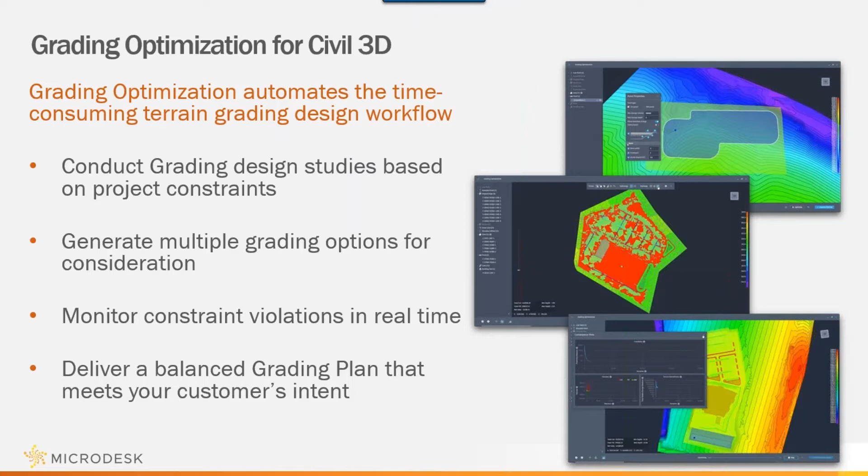All right, so I have a simple file here with just a handful of different objects that we can utilize to play around with. Some of this line work you see in this portion of my site is just lines and polylines, nothing fancy going on here. I do have an intelligent Civil 3D surface, but everything else is just simple two-dimensional lines and polylines, no elevational data, no design information whatsoever at this point.

So the new grading tools will be found over on the Analyze ribbon tab. If you work your way all the way to the right-hand side, you'll see the grading optimization panel. There's a couple things we can open up, and one of them is going to be the grading object browser, and this is where the intelligent grading objects are going to be stored once they're defined.

So all of the grading tools will be found on your tool palettes, just like your typical assemblies and things like that. They're going to have their own tab, and here's all the various grading properties that can be assigned to different object types. You can assign them and then set the properties, just like an assembly would be, or you can set them in advance.

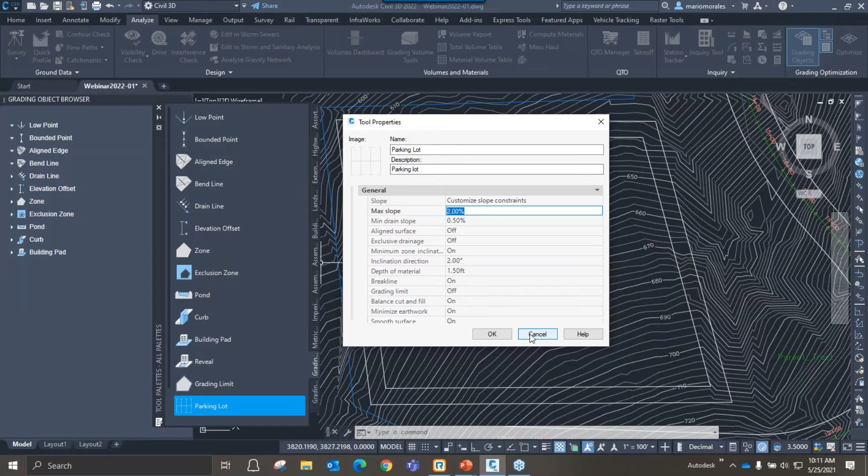So let's go ahead and start assigning some properties. I'm going to start off by establishing my grading limit, so I'm going to select that polyline there and press enter. You'll see that the properties of that object come right up, and I can see that that has established my grading limit here.

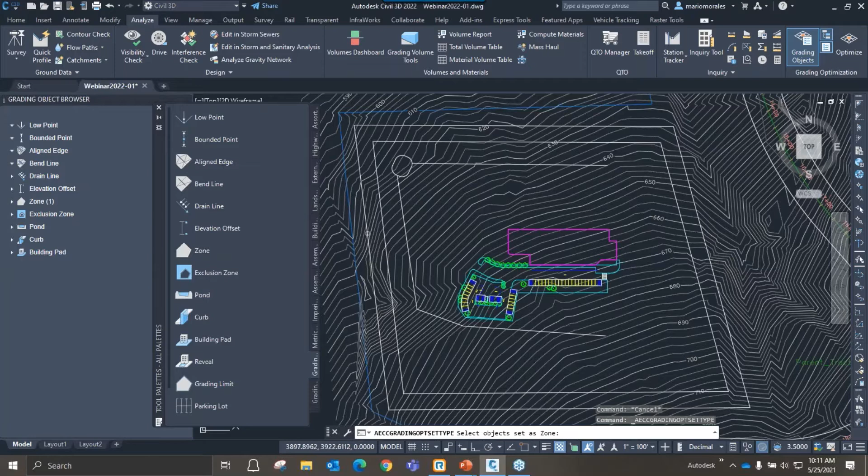And then I can use my global design constraints, or I can specify my minimum and maximum slopes, or I can use no slope constraints at all. So that one's been defined. Then I'm going to go ahead and create another zone, just a grading zone, up to the grading limit, so I have a grading buffer. This one is not a grading limit, so it's just a defined zone.

Then I'm going to work my way into the site and establish a building pad. I'll select this, enter, and again I can choose to give it a known elevation I've designed for, or I can leave it off and let the software figure out what that pad is going to be. I can also define a depth of material as well as colors. So that looks good, let's continue on.

Let's go ahead and do some curbs. So I'll go ahead and grab all these little curb islands, and now those are all defined as well. If I select any one of those, we can see the properties that have been defined.

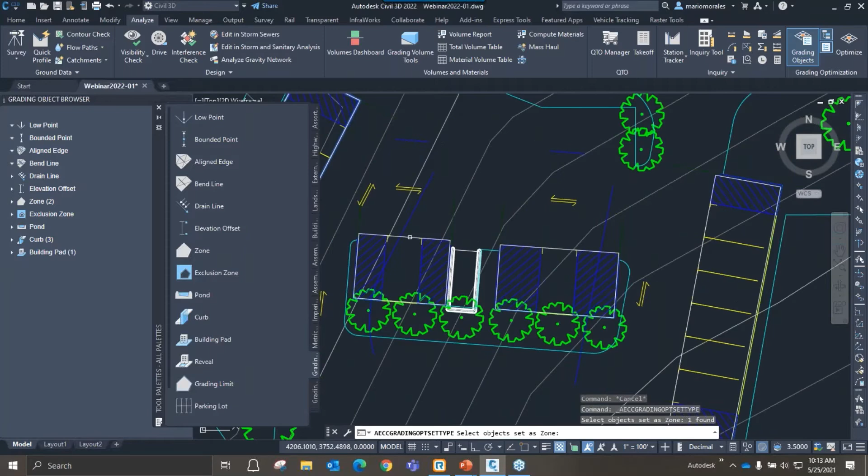I can then define some of these parking stalls here, here, here, here, and here. Now those are all defined as well, and you can see it's adhering to those properties that we just looked at a moment ago. So that's all looking pretty good. Let's go ahead and put in a pond.

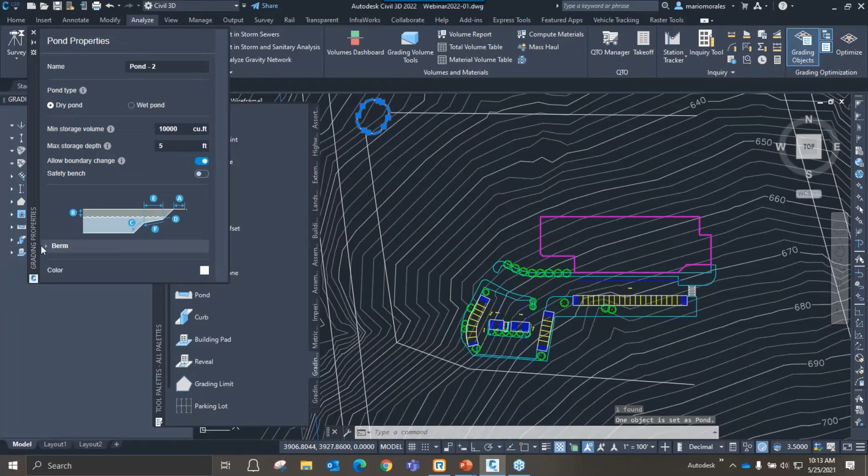Select that, and my min storage is going to be 10,000. Let's go ahead and go with a maximum depth of 5 feet. That looks good. I can choose to put a berm additionally on there if I choose to, or adjust that edge condition however I like.

And then I'll add a couple drain lines, flow lines if you will. So these can be just graded flow patterns or ribbon gutters or whatever you'd like them to be.

All right, so we've just defined a few different objects. There's other things we can do. We can use low points and set a couple of COGO points to grade to various locations and different things like that. But for now, I think this looks pretty good.

So let's take a look at what design iterations may come from what we've just defined. You can see also on my object browser that all of these elements I've defined are stored in here now, and I can select these. I can change the properties at any time. You can also change them as the design iterations evolve.

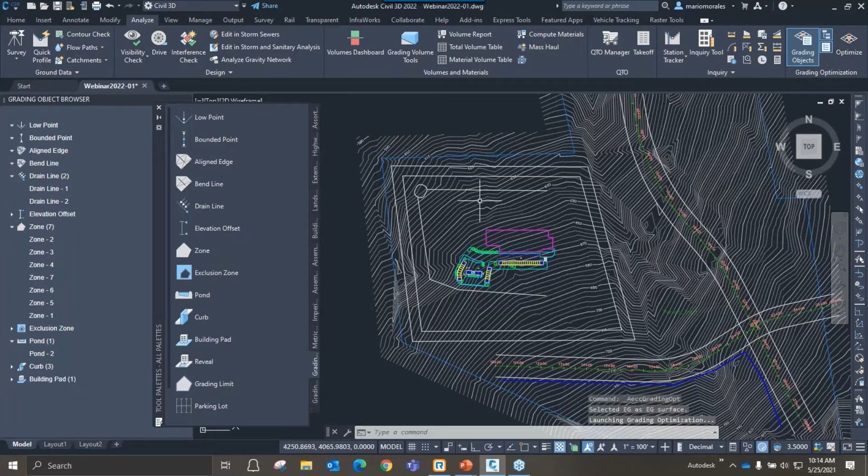So let's go ahead and try this out. We're going to go up and choose Optimize. Give that a second to launch. And as you can see, it opens up in its own standalone application window. So it's going to take a second to generate.

And now I can navigate about this site. I can look at anything I want in here. And I can also select elements, just as we did in Civil 3D, and change the properties.

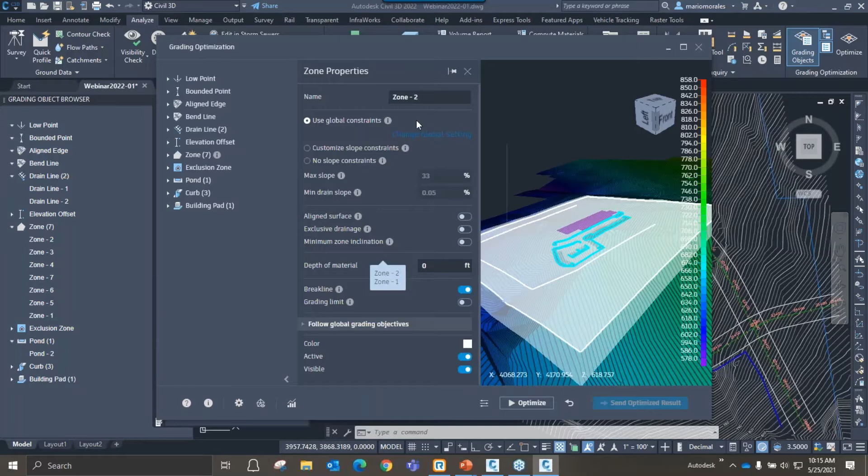So if I don't like the way the design is going, I can change things on the fly, and that's how I can come up with different iterations. So before I begin, some of the other things I'm going to want to look at are going to be the settings. So what are my slope conditions?

So my maximum slope is 33%. Let's go ahead and make it something flatter. I know I'm going to get violations, but I actually want to do that so we can see how we get that real-time feedback.

We'll do slightly less. We'll do 50,000 iterations. And now we can control what we want the outcome to be. Do we want to balance the cut and fill? 100% means yes. We can take that down to somewhere in the middle.

Or if we don't care about the balance at the moment, we just want a good design, we can take it down much further. We can adjust, minimize the earthwork, and then we can even tell it to smooth the surface and triangulations as we go. So for now, I think I'm just going to take that down a little bit. That looks good.

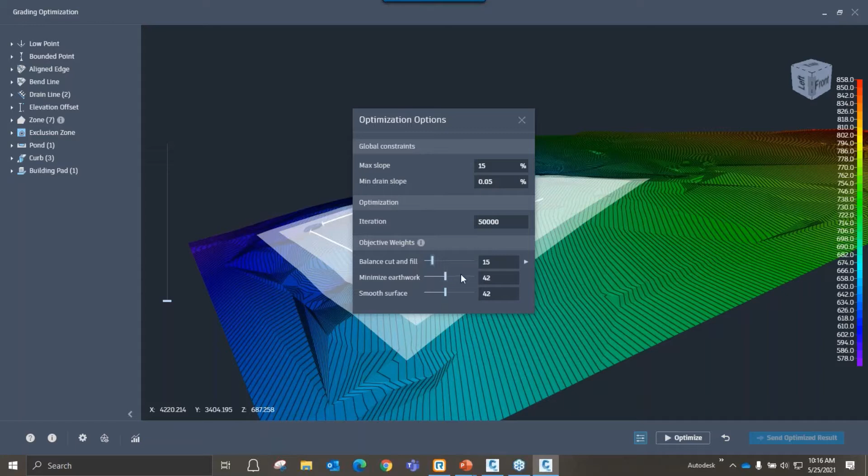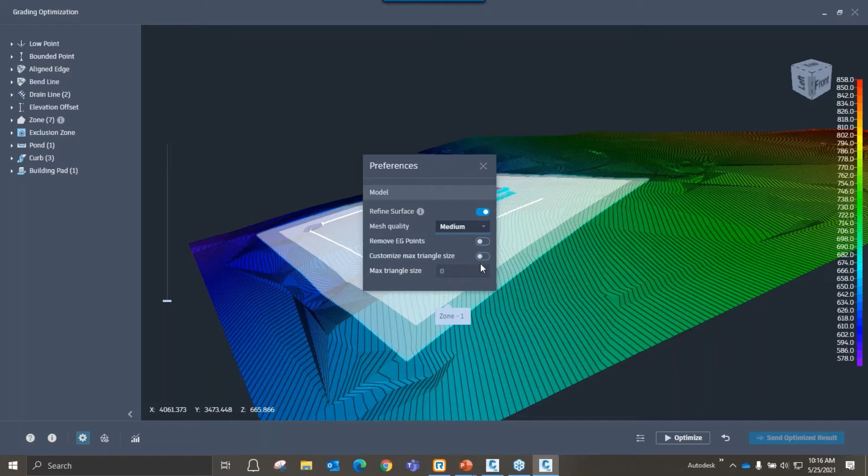And then over here in our settings, we can also tell it some of the preferences of what it's going to do as it's generating the final design. So what is the quality of the surface tin? We'll leave it at medium right now. We can also get rid of any of the EG points, and we can adjust the triangle sizes as well. So I think that looks good for now.

And so let's just go ahead and say optimize. You can see how the feedback is coming in. I'm getting a notification that between my grading limit and my first zone, it's about 39% slope, which is still less than a 2-to-1, so I'm okay with that.

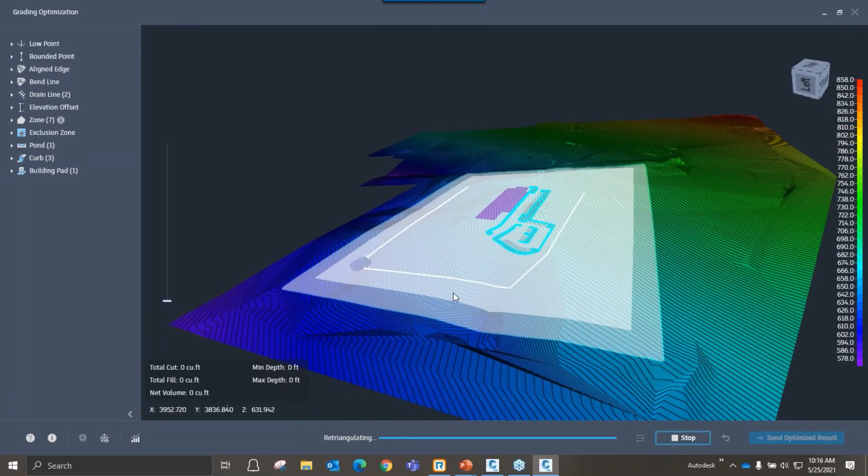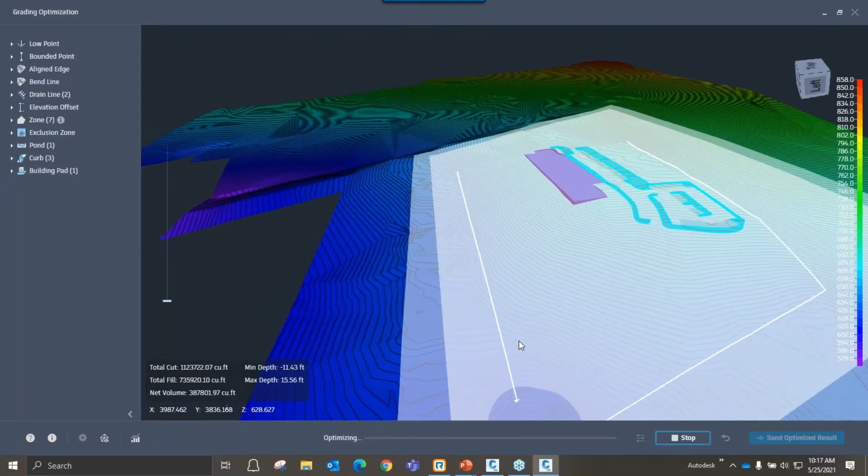And now you can see how it's taking my 2D line work and it's already building up a grading pad. I'm starting to get a pond over here. We can see the flow lines, and you can actually see those contours dynamically adjusting as it's refining the design. And you can see how the parking stalls have a flatter grade than the rest of the parking area does.

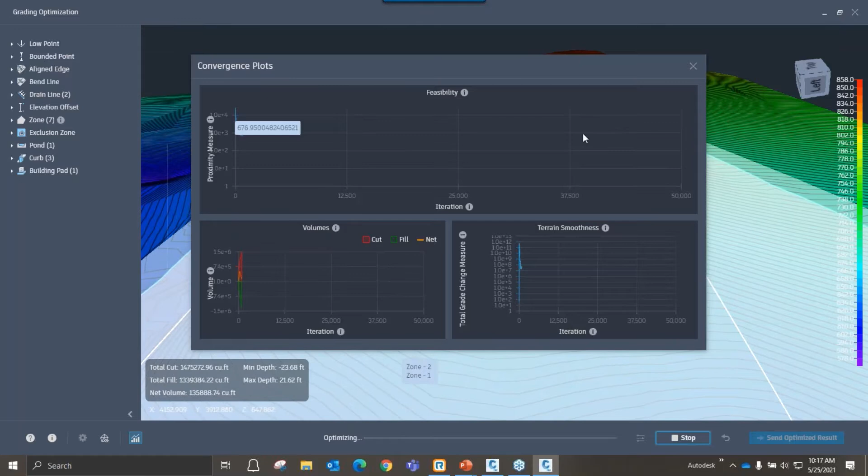We can also turn on the heads-up display controls and look at the convergence plots and see how it's going through the different iterations. As you can see, it's just barely starting those 50,000 iterations. And you don't have to wait through the 50,000. You can iteratively stop this whenever you choose to.

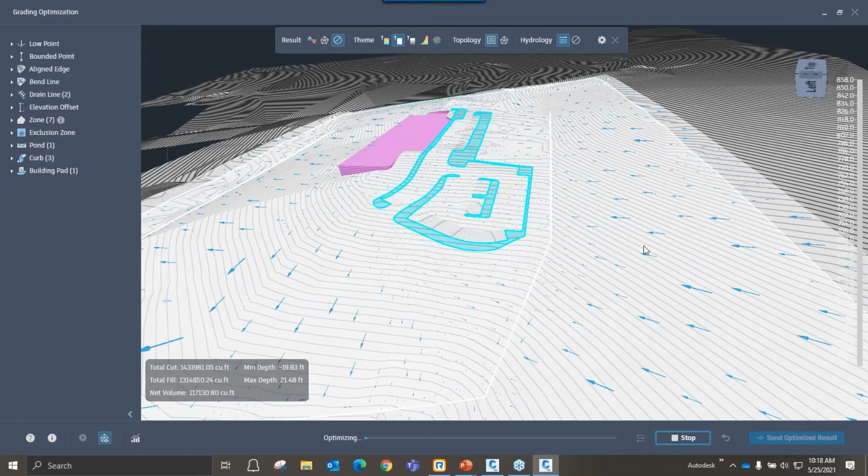But what we can do is we can also control how we're seeing this. We can just look for the red spots to see the slopes that are pretty extreme. One of the things I like to typically do is turn on the hydrology, which is going to show me the arrows, the flow directions. And that's going to show me how my flow lines are working. Okay, and everything's draining to that pond over there.

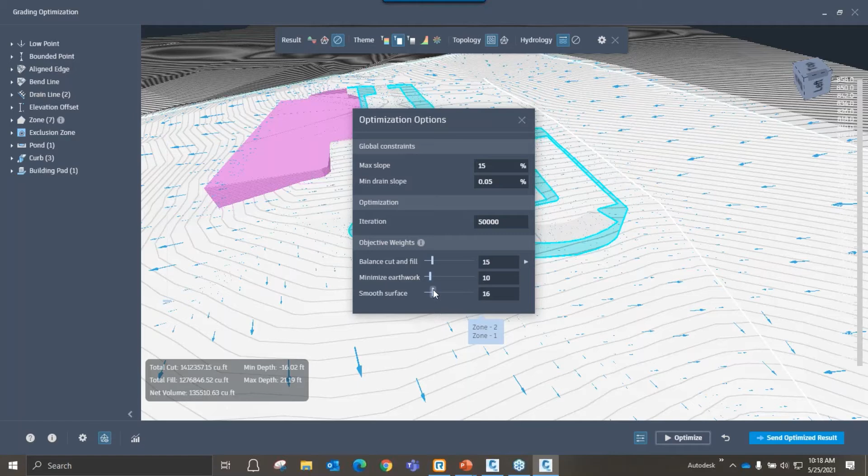That looks good, and again I can stop this at any time. Then I can simply come in and say, well, that looks pretty good, but let's minimize some of this earthwork adjustment. We don't need to worry about smoothing right now. And then we can run it again.

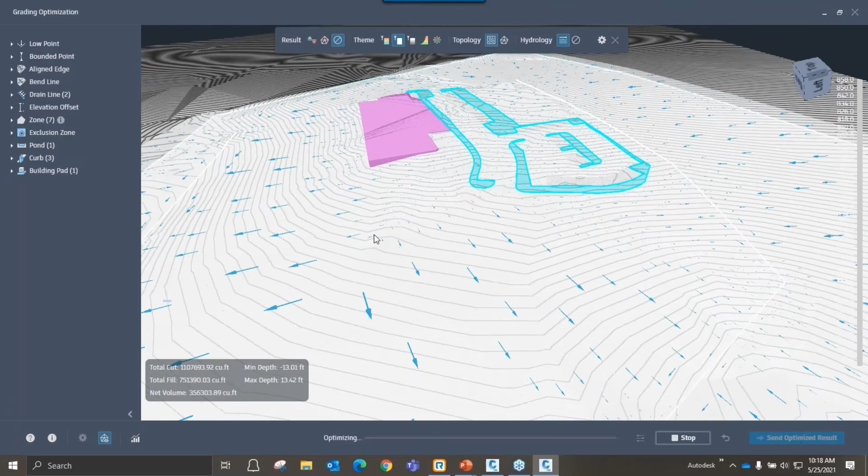You can see that pad is built up there. It's going to reset with those new values I've chosen and come up with a new design concept. So it's working its way through thematically, looking at the different rules, properties, and constraints I've defined, and it's defining that site for me. I haven't had to go through and calculate a pond size, depths, or a building pad at this point.

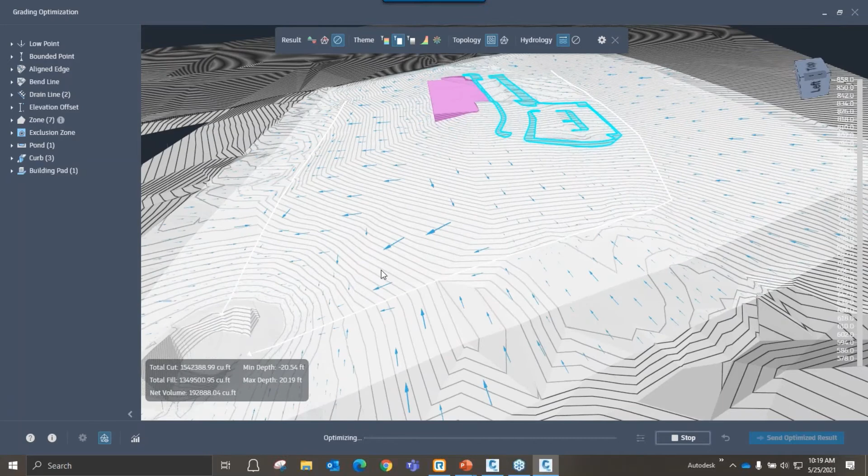It's just simply going through and figuring out what my design is going to be. Again, I can let this thing sit and run until I'm happy with it, and I can stop it at any given time. When I'm done and everything looks good, I can simply stop this, go over, and say send this optimized result.

Then back in Civil 3D, I can choose to bring in a new surface with all of this new grading in it. I can have it generate the feature lines, so I'll have 3D polylines for all the curbs, slope edges, and ponds. Any low points I may have done will come in as COGO points as well.

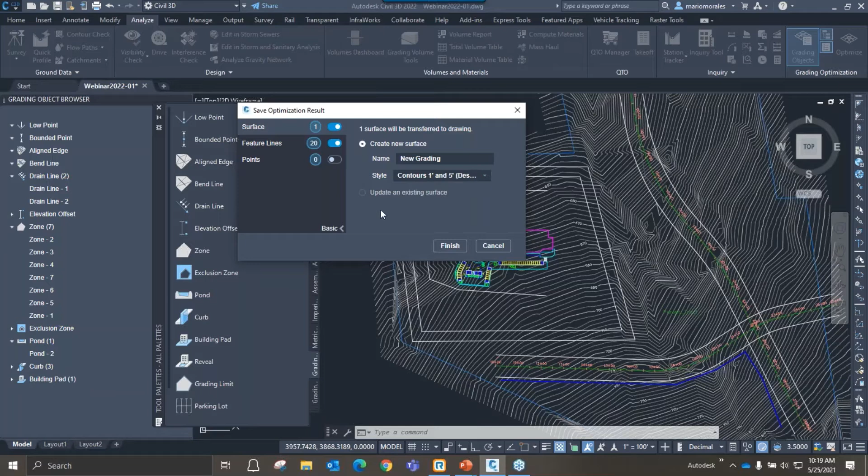So let's go ahead and create a new surface. We'll call this new grading, and we'll choose a style for it. We'll do one and five design contours. For the feature lines, we'll just have them put into a new site with the basic style. That's fine, I'm going to go ahead and choose finish.

My event viewer is going to pop up just to let me know there are some duplicate points that may have gotten ignored and omitted from the property definitions, but I can just go ahead and close that out.

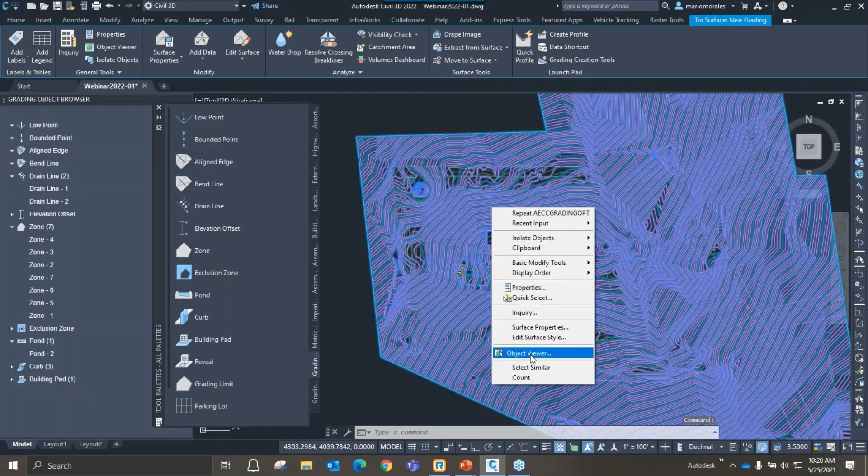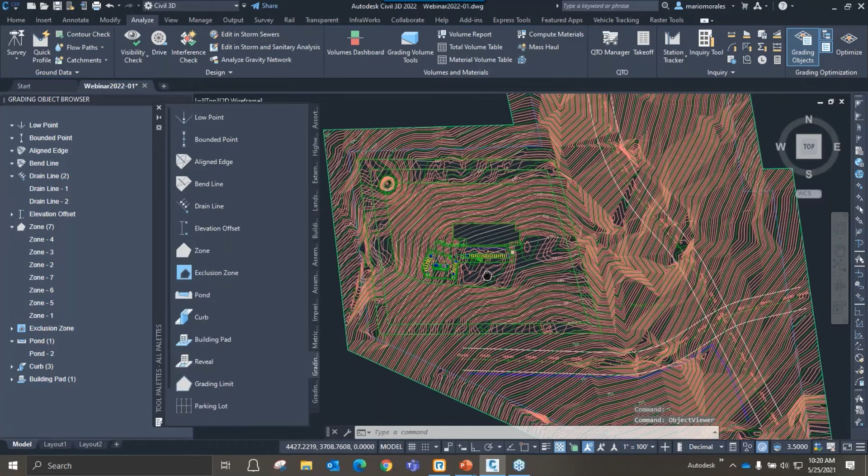As you can see, this new surface, without me doing anything design-wise or calculation-wise to figure out what my design was going to be, actually went through. Even though I stopped it a little early, you can see all my curbs have been done, my parking lot's been defined, and my pad has been defined. Again, I can work through different design concepts and iterations and send all of these right into Civil 3D.

This cuts down a dramatic amount of time you'd normally spend conceptualizing your grading design by letting the software figure those things out for you thematically, based upon the properties you choose to utilize. So it's definitely a really cool little tool, and I'm very excited about that one.

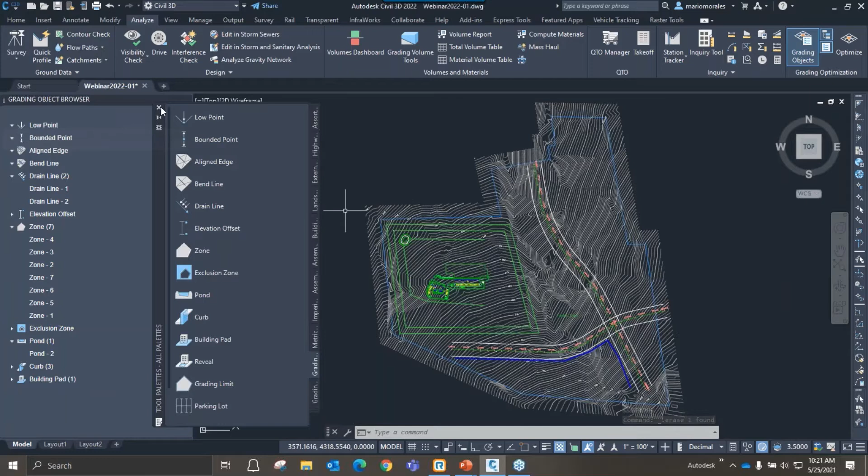Another enhancement they've done, kind of an enhancement slash new feature if you will, is the connected alignments. Connected alignments came out a little while back, and they're really handy and useful. If you haven't had a chance to play with them, I definitely recommend it. They're good for curb returns and things like that.

We've added some new functionality to those that we want to explore, so we can have a lot more control over the curves, the grouping, and the properties of that connected alignment. We can also do loop ramps now, so if you happen to have those little cloverleaf kind of interchanges, we can do these very quickly and easily as well.

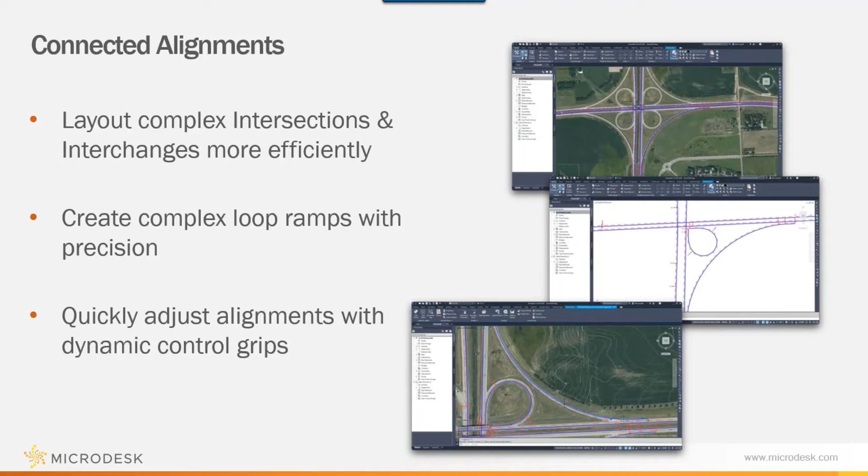Once those are generated, we can control them like we do most alignments, through alignment properties or through grip control and things like that. So let's take a look at some of that now.

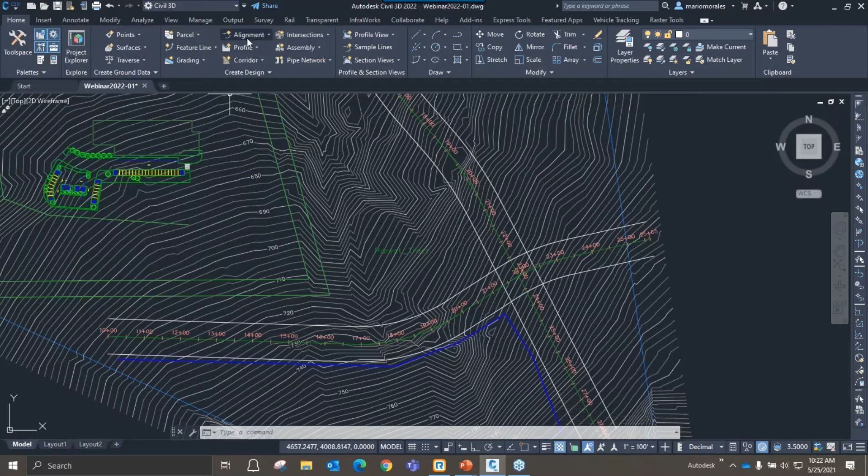I happen to have a couple of alignments representing an intersection, as well as some offset alignments that are dynamically connected to those parents. I'm going to go ahead and go back to my Home ribbon tab, and on my Alignments dropdown in my Create Design panel, I'm going to come down to Create Connected Alignment.

I need to choose the two alignments I want to base it off of, so I'm going to select this one and this one. Pick my location, I want it to go right about there. That looks good, so I'll press Enter to accept that.

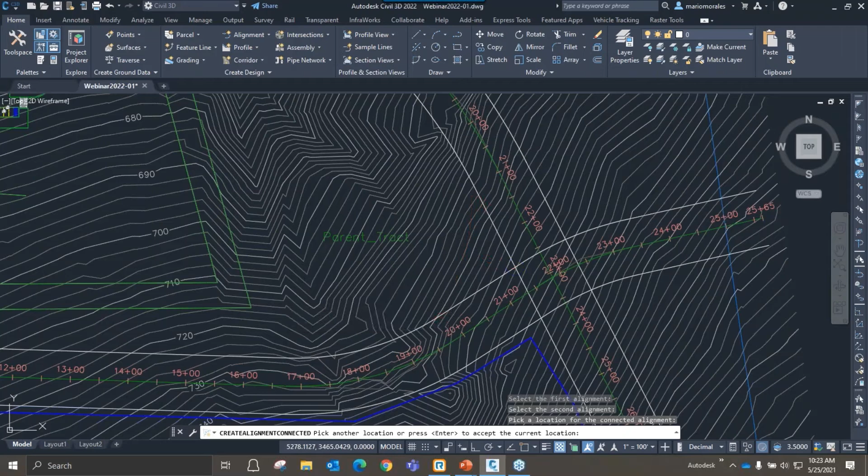In previous versions, we always had the ability to name it, apply a style, things like that. We don't necessarily need any labels on it. We always could put in a criteria and even a connected profile, but besides that, all we could really do was define a radius before.

But we have this new parameters tab now, where we can go and define different curve groups. So you can do a circular fillet and see what that's going to look like. We don't need any offsets here, so let's go and zero that out.

There we go. You can also go to curve, spiral, curve, spiral. Preview that, see what that's going to look like. Reverse, preview that. If the geometry won't be definable based upon the radius and properties you've set up, you can change the values to something smaller or choose a different design concept to see if those things are going to work.

So those things are pretty cool in that regard. And we also have the ability to put in overlap connections, so we'll kind of trace the two alignments, if you will. That's a really nice enhancement that they've done. But another really cool thing they've done is now we have the clover alignments, if you will.

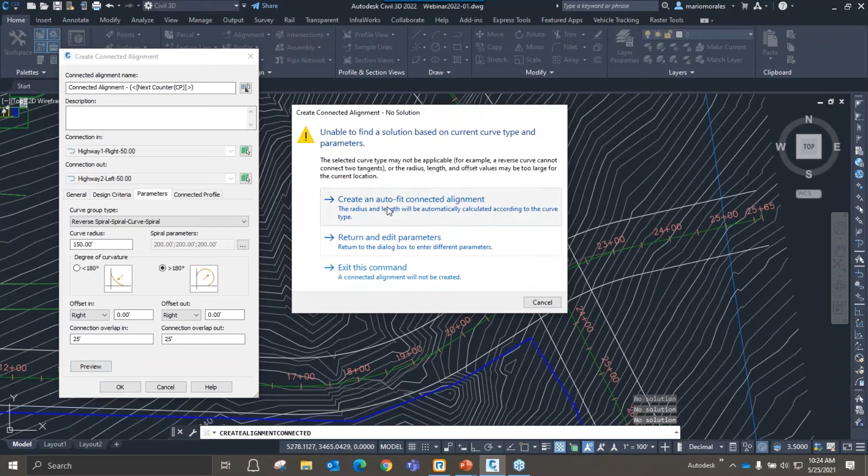So if I toggle over to that type of property, I can preview this, and we can see that it's going to come in that way. Again, I can go through and choose different curve groups and see what design concepts are going to fit. And some of these properties are a little bit too big.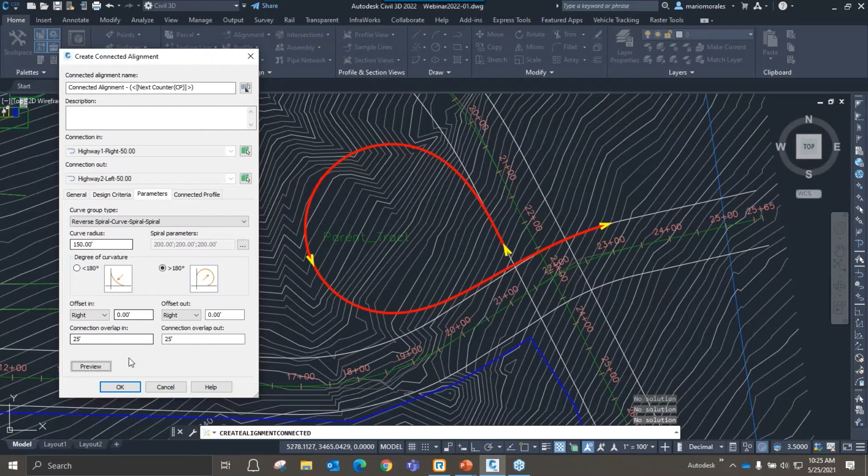That's okay, we can kick that down if we need to. So this one, you can see how we're going to kind of follow along, come off of this one, off of a spiral. Yeah, it's going to be a reverse, come around, swing it around. So that's looking pretty good, it's a pretty nice little alignment there. And I can go ahead and say, okay, it's going to define that.

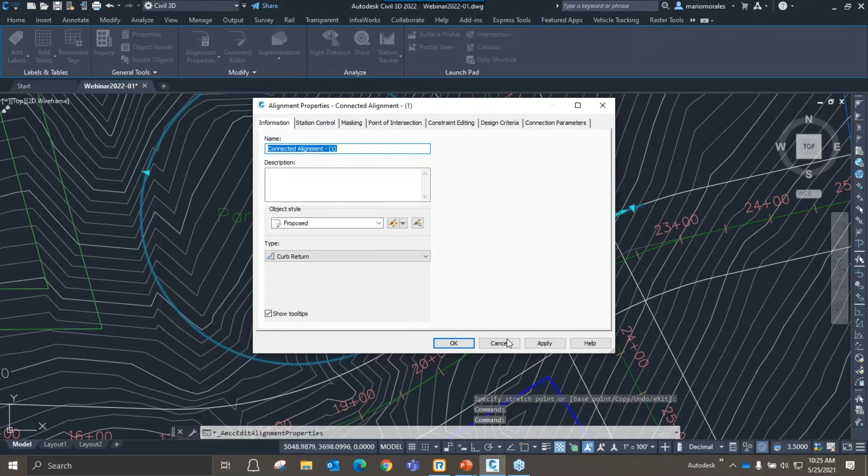Again, I can put in station label groups if I want to, or whatever I need to do. And then I can also select that, and I can use my grip controls to adjust properties, offsets, radii. I can go into my various properties of that alignment, as well as bring up my geometry editing toolbar, where I can start looking at the various properties that have been put together for that.

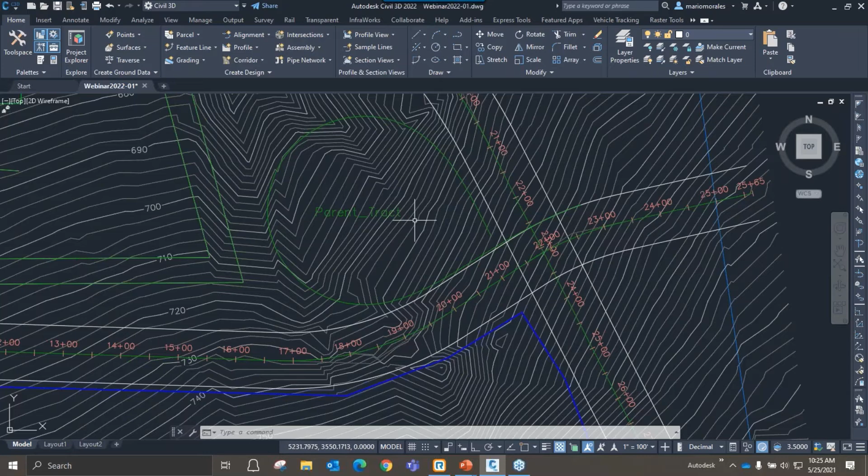So if you've ever had to do any of these clover alignments for various ramps and things, you know they can be a little bit tedious. You end up kind of drafting and engineering these on your own manually and then defining them from polylines, where this is a much more efficient, streamlined way to generate those. So definitely a cool little tool.

And we've also gotten some new functionality as it relates to Project Explorer. And actually I should have mentioned it too for the grading optimization tools, both of these features are available to AEC collection as well as enterprise license owners. And so once you have these, you'll see that the Project Explorer came out last year, but it's added a lot more functionality now. And it's one of the really predominant tools for working with just about anything in your drawing, because it really manages and controls and allows you to create blanket property adjustments very easily on lots of different types of objects.

So because it's become so popular, it has been moved right to the Home Ribbon tab. So you'll find it right on the front end as soon as you open up the software. And it now supports all local languages. And some of the newest functionality that is only available in 2022 is it now supports pressure pipe networks.

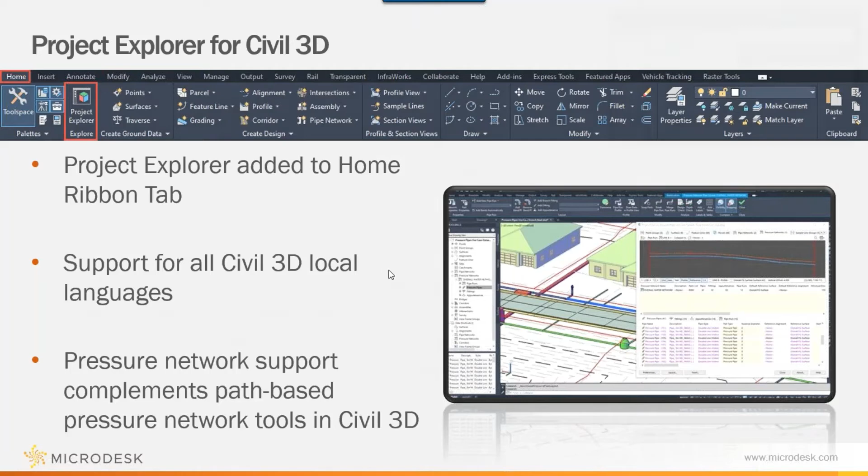As it relates to the pressure pipe networks, there's lots of different things that we can do with these. We can bring those up in our Project Explorer, edit the network's information itself, edit the naming and the styles. We can automatically and dynamically show profiles over the pipes and the various pipe runs. We can edit multiple properties at once, edit the layouts of the pressure networks as well as the parts, and generate reports as well as tables for parts, networks, or runs. Lots of different cool things.

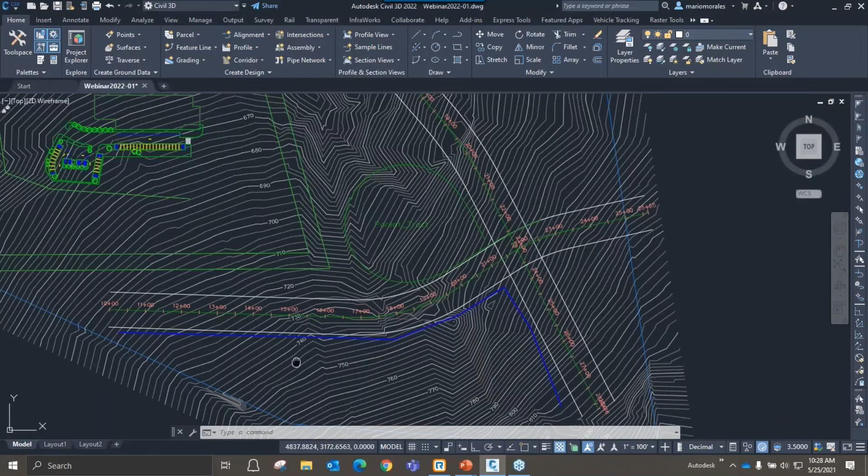And then aside of the pressure pipes, they've also added functionality to support feature lines that are not included in sites, so standalone feature lines. So let's take a look at some of that now. I happen to have a little pressure pipe network laid out right over here, and again, your Project Explorer is going to be right here on your Home ribbon tab, so you'll see that right there.

Previously, it was on the Add-ins tab. So we'll go ahead and launch that.

If you're not familiar with the Project Explorer, it's a really cool tool, definitely worth exploring, because you can make lots of really fast global changes to your design without having to edit every single piece and part manually. Along the top, you'll see all the different categories.

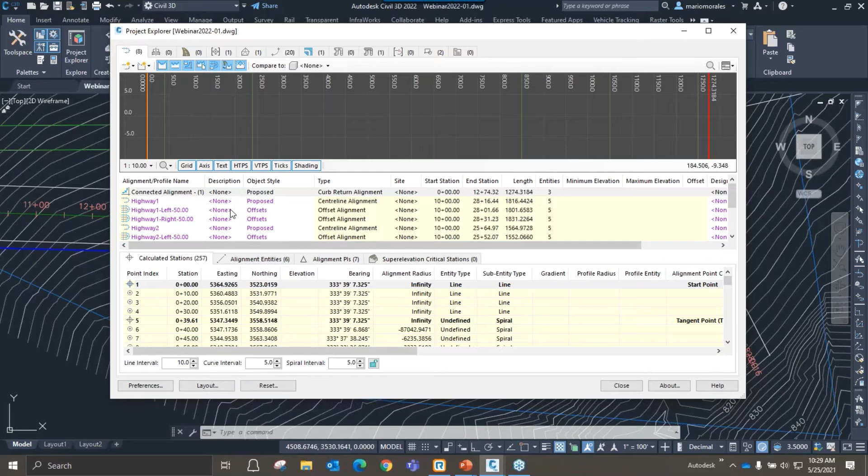So you can see I happen to have 8 alignments in here, no corridors, point groups, a surface, 20 feature lines, lots and lots of things. Down here, we can get to all the various properties. As you cycle through these, you can work with the data, but you can also edit the data.

So if I come over here and look at my surface, I can change styles, I can adjust properties on it. Same thing with my pipe networks. So here's my pressure pipe network.

And I can control my displays right down here just by choosing what properties I want to see throughout this, and whether I want to see the ground above it, things like that.

And then I have it all divided out. Here's all the various pipes that are making that up. Here's all the various fittings. I don't have any appurtenances, and 9 runs. So very easy to be able to go in, look at the properties.

I can globally select things and make design changes, pipe size changes, slope changes, again, without having to go to each individual piece and part. So it definitely saves you lots of time when you're editing a system.

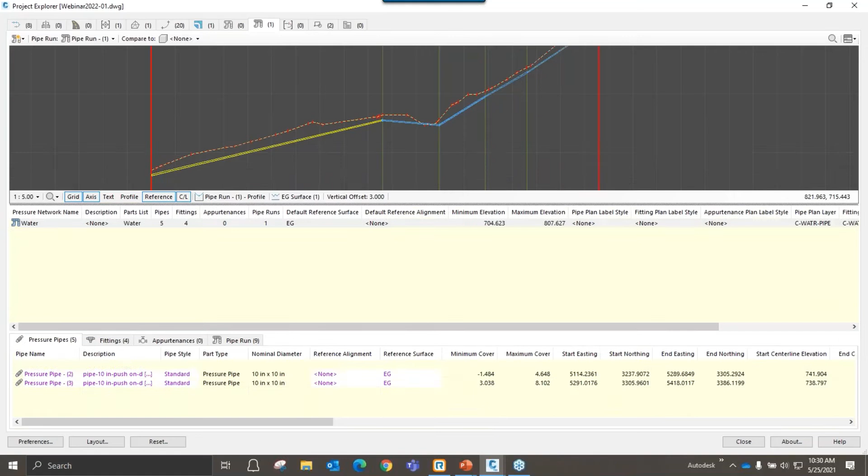We can also come in and go ahead and create an object set. I'll go ahead and do that. I'll call this water. Once you make an object set and put that system in there, you can generate lots of different report types, table types, things like that.

In this case, I'm going to generate a table in model space. I'll pick a point where I want it to go, and we'll just pick somewhere off to the side over here, right there. That looks good. And then you can change all the properties and things, but that's fine.

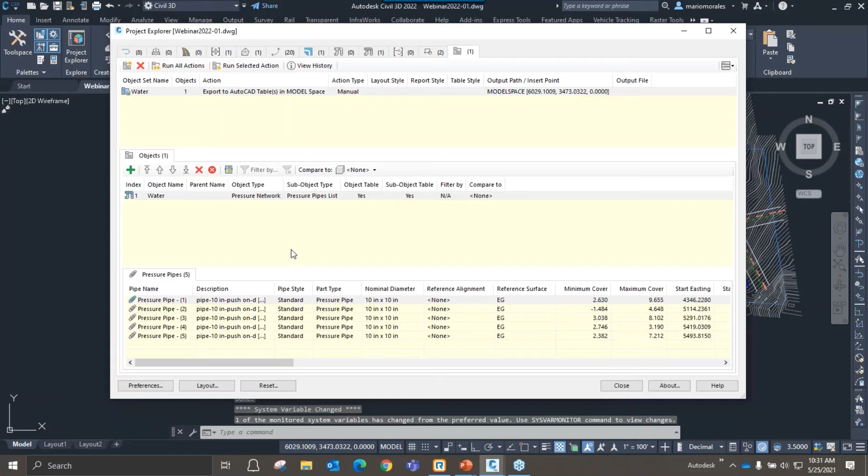So now that's defined, let's go ahead and add some content to that. We'll go ahead and add our water system. Say okay. And all that's been defined now, and I can say run the selected action.

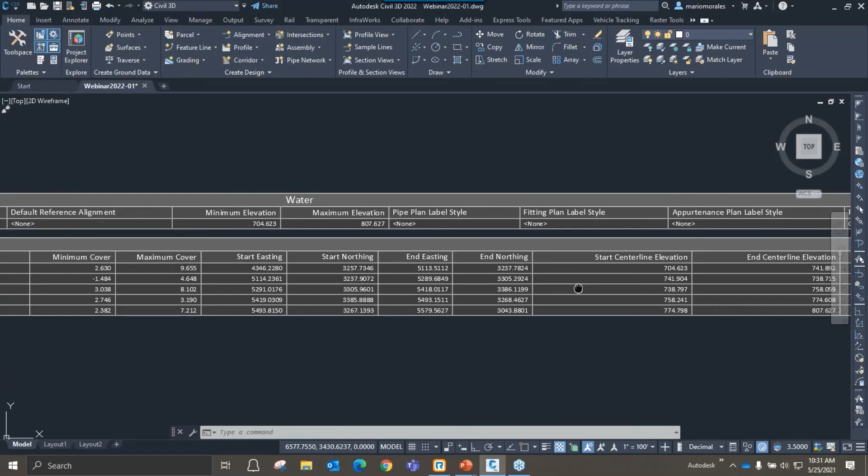You can see right off to the side how that table got generated. I'll go ahead and choose close. I didn't customize this in any way, but you can see now I have a dynamic table for my entire pressure system with all of its properties that's going to update as I make changes to the design.

An additional enhancement that you'll see in the software for release 2022 is at the top of the screen on your quick access toolbar, you will see a new share button. That new share button is going to allow you to share a link to a drawing, and it's going to save a copy up to your cloud account and generate a link that you can share with your consultants.

Contractors, whoever may be. And you can set it up to be in view only mode or in something that they can edit and save. So it's a really nice way to be able to share those files without having to upload things to FTP sites and things like that.

They've also added some new enhancements to pressure pipe networks themselves. They've given you the ability to control the display of the layout compass. Now you can go into the options on the ribbon and adjust the size, the color, things like that, so it's a little more user-friendly.

And on the profile ribbon for pressure systems, they've added path-based pressure systems, which is pretty nice, so now you can do that straight off the ribbon as well. They've also added spanning labels for pressure networks, which is great because previously you could only do single segment labels. So now we can do spanning labels across entire runs, which is pretty handy also.

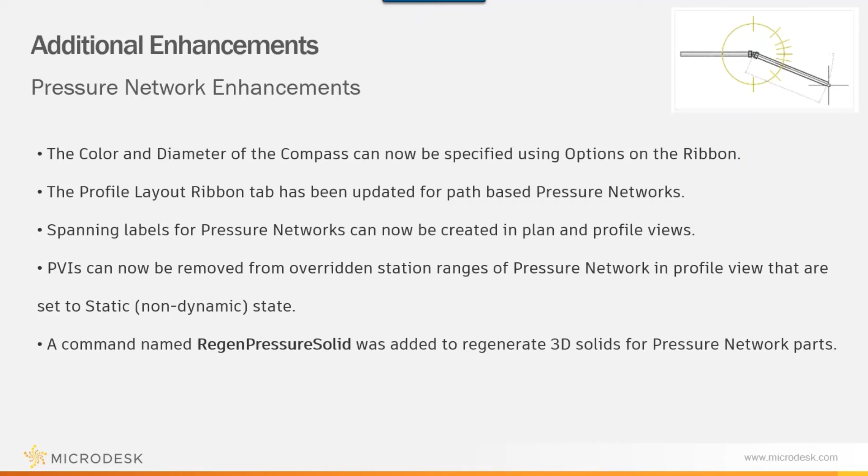They've also done some enhancements to the ArcGIS connection workflows. Now raster data that's imported can be refreshed independently, which is pretty nice. That's a really cool feature.

Also, the resolution can be configured separately with each raster layer, so as you're importing or refreshing those, you can adjust the resolution per layer, not globally for the entire drawing. The resolution levels for importing GIS data for rasters has also been extended—it used to be 19 levels, and it's now up to 23.

Also on your tool space, you'll notice the default content libraries have been greatly enhanced. You'll find lots more tabs up there, and in there you'll find entire libraries for things like parking, landscape, building footprints, highways, different city furniture, signage, foliage, and more—lots of trees, shrubs, plants, flowers, and all kinds of things to further enhance your designs.

Also remember, Civil 3D is written on top of Map 3D as well as AutoCAD. So in addition to a lot of these new features I've shown you, you're also getting the benefit of all the new features included in those other products as well.

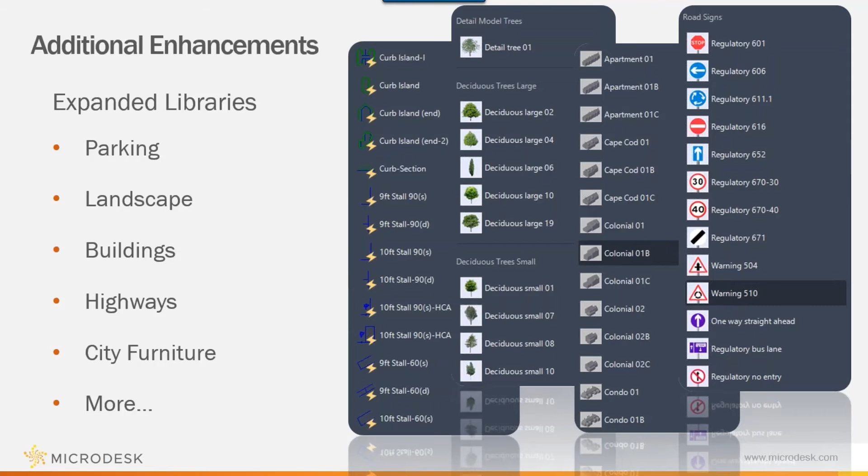So just a quick recap on some of the things we saw today. We started off looking at the new grading optimization tools and how to utilize some of that, define it, and come back with different design iterations. We looked at some of the new connected alignments, and we looked at the Project Explorer and how it's now supporting pressure pipe systems, as well as some of the additional features that have been included.